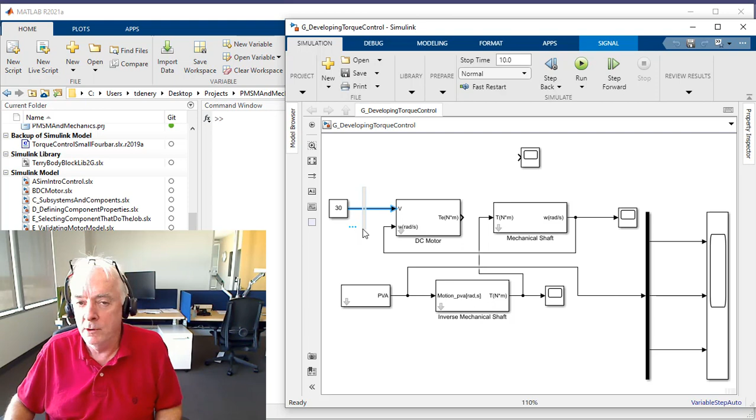And so we're going to compare what we want with what we're observing and use that information through a PID algorithm to adjust that voltage and get the torque that we need. All right. So let's get started on this. I'm going to delete all this stuff. I'll delete that scope. And I'll use that calculation to figure out that voltage to some degree, right?

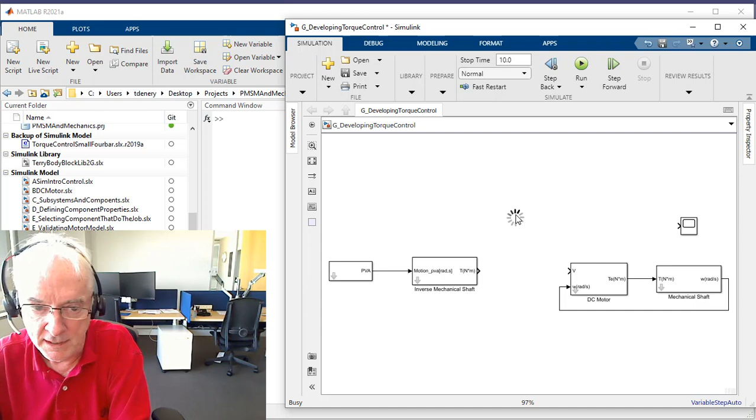So I'm going to move this up right here. Let's move it a little bit further because we're going to need to add a little bit in between, right? So our commanded motion will imply a commanded torque, and we will compare that torque with what's being delivered to the mechanical shaft by our DC motor. The algorithm will be a PID, and the PID will choose the voltage that we're going to apply to the motor, and it needs a little bit more to do it, all right?

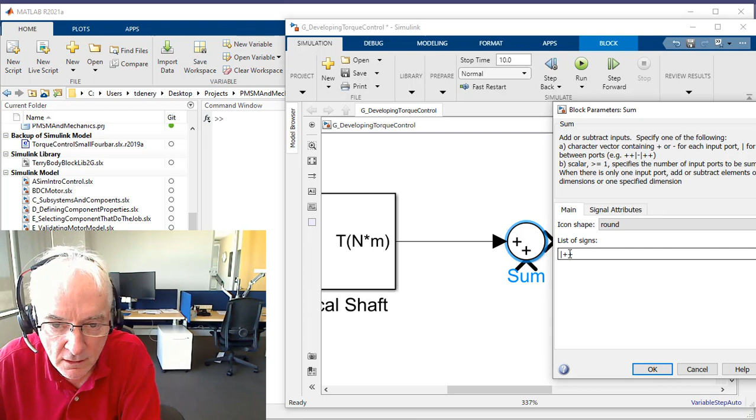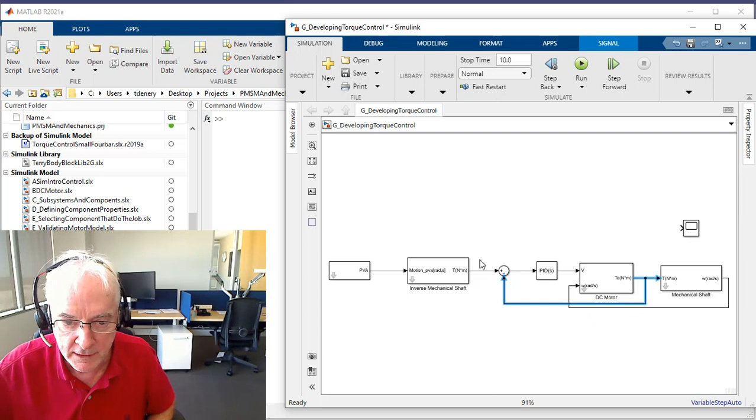So I'm going to type in SUM for the sum block. I'm going to put this in right here. Let's zoom in real close. And so instead of this being configured with a plus plus, I'll make it a plus minus. Let's hit the space bar, and through this we'll make a comparison between what we're commanding torque to be and what we're observing. The difference between the two will be presented to the PID.

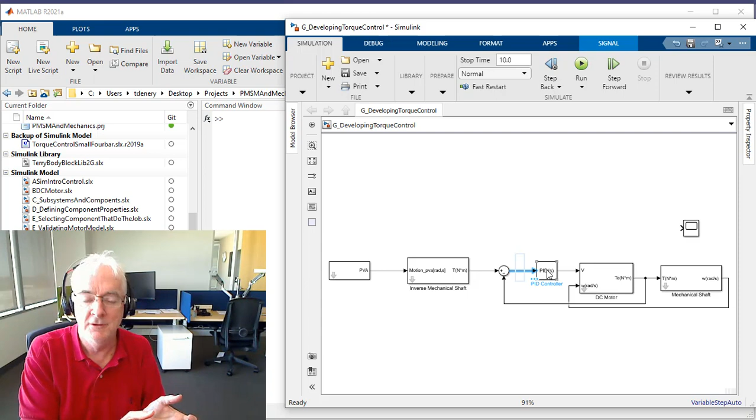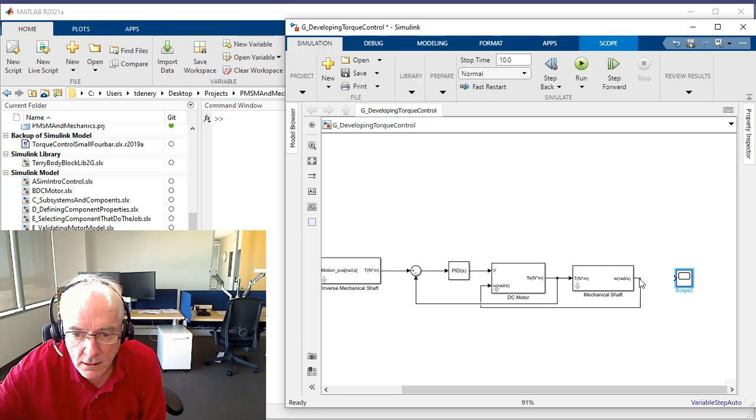PIDs are superb at driving errors to zero, or at least driving whatever's coming in to go to zero, assuming that you're able to control something real that does have that kind of impact. Okay, so let's get into what I mean by that. We'll just observe the system through this angular velocity measurement. Let's go ahead and hit run and see how we do.

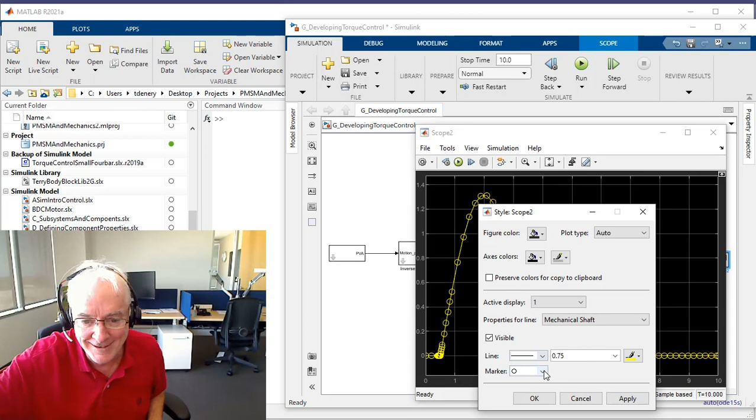Okay, so somebody put those markers back in there, so I'm going to get rid of those. No, that's me. I don't know how I did that. So let's choose none.

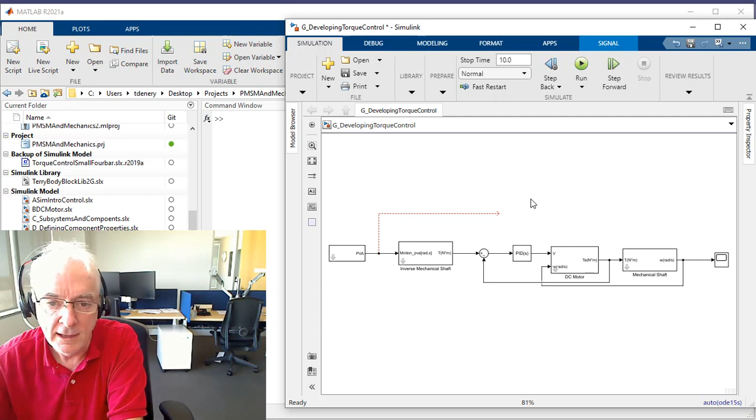Okay, apply. From the previous video, I recall that velocity really does have this kind of parabolic shape, so that's good. But we really do want to check, so I'm going to take our commanded signal, and you'll recall that that's position, velocity, and acceleration, and all we really want is velocity to do the comparison here. This selector block is very useful at just picking off that second signal, which is the velocity, and I'll send it into that same scope.

Hit that, and let's look at how we did. It's kind of interesting that we were able to get the same shape. Again, PIDs are kind of cool in what they can do, but it's not doing a great job yet, right? So let's go into the PID block.

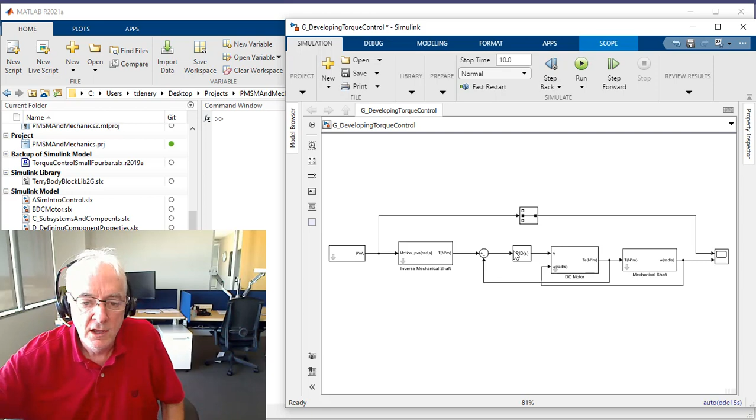Now again, PID, proportional integral derivative. It means that the error signal coming into the PID block, in this case a voltage that is going to be identified that achieves our mission, the voltage being delivered will be composed of the sum of Kp times the error, Ki times the integral of that error with regard to time, and then Kd times the derivative of that error with regard to time, okay?

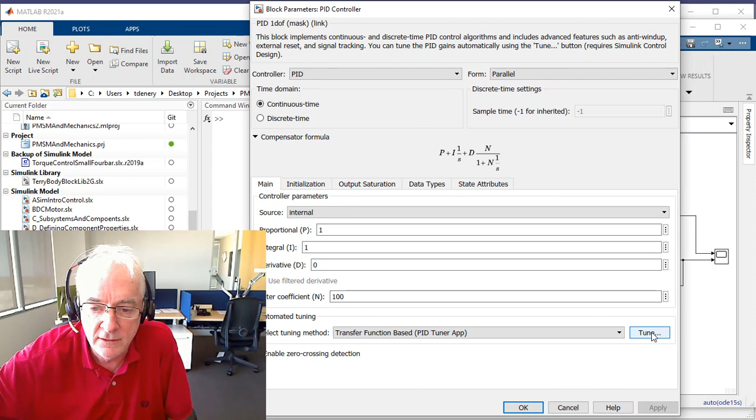And what those values should be really depends on the thing that you're trying to control, right? And it's kind of cool how, let's put this on screen so we can really see this, it doesn't even really care about units that much. All that stuff gets kind of worked out and incorporated into these identified parameters, right? Okay, let's move that back.

All right. And what we're going to see is that there's amazing capability that's been developed by controls engineers over the years, things like analyzing a step response. And this is generally thought of as, hey, I want to command a step from 0 to 1, and I want to see what the response would be. And there's things like Bode plots and root locus and all kinds of amazingly useful tools that have been in the Control System Toolbox for quite some time.

And we're tapping into that because we're sitting on top of the calculation capability of the Control System Toolbox, right? By clicking on that tune button, it's saying, well, before we're getting the dashed line with the values of 1, 1, and 0 for those three parameters. Now, if you switch it to 0, 120, and 0, which is really interesting that it's purely I, you're going to get a better response, and that's what's showing up with the blue curve.

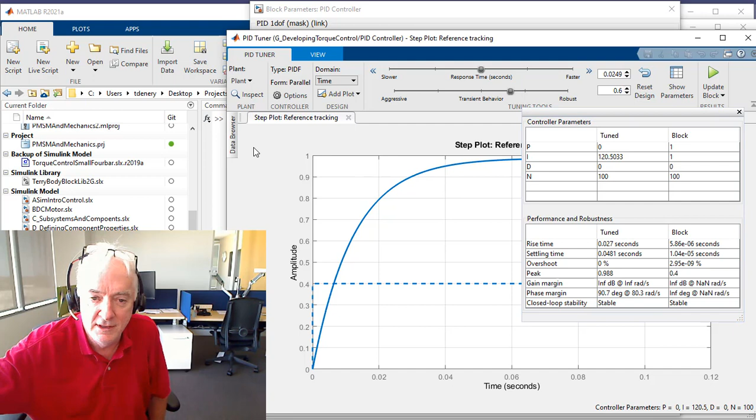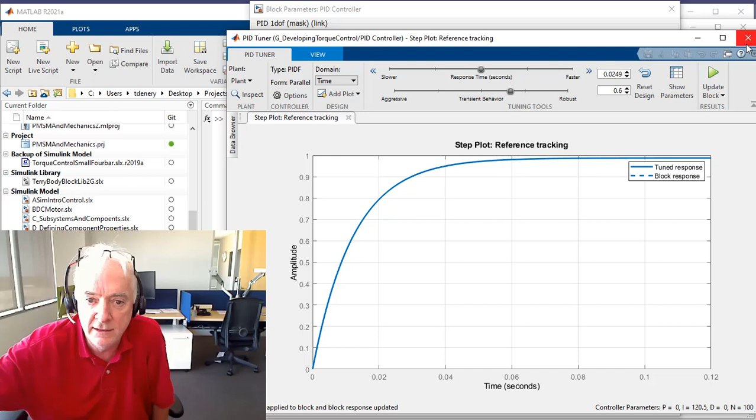And we look at these numbers down here, and it says, well, it looks pretty good. Rise time of 0.03 and so forth, and so I'm highly encouraged that this will be better, but it's always a good idea to try it out, right? And so I'm going to update my controller with these newly calculated gains, which we see right there. And let's run it again. So certainly way, way better, okay?

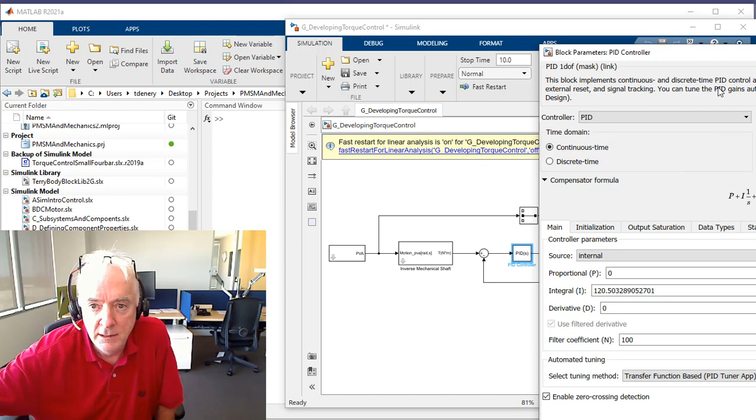But I would argue that it still can be a little bit better than that. Whatever that algorithm thinks of as being good, I may not agree with. And I definitely want that blue curve on top of that yellow curve a little bit better, right? And so I'll simply go back into the PID block. Let's hit that tune button again. And it's kind of simple what I'm going to do here. I'm going to just ask for a faster response.

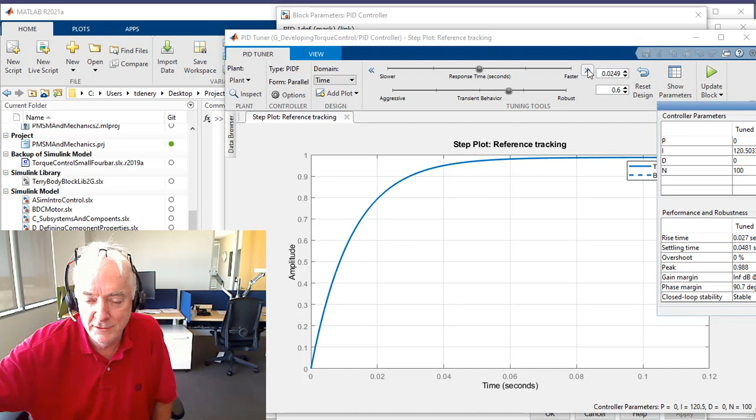So if you look at where we're going from, if I click this right here, I'm good with robustness, and these are important terms, but I'll just avoid the definition for right now. I'm going to make it a little bit faster, and so you'll see the blue curve is where we're operating now, and you'll see things like rise time and settling time. They're quite a bit better. And with that, I will hit the update button one more time.

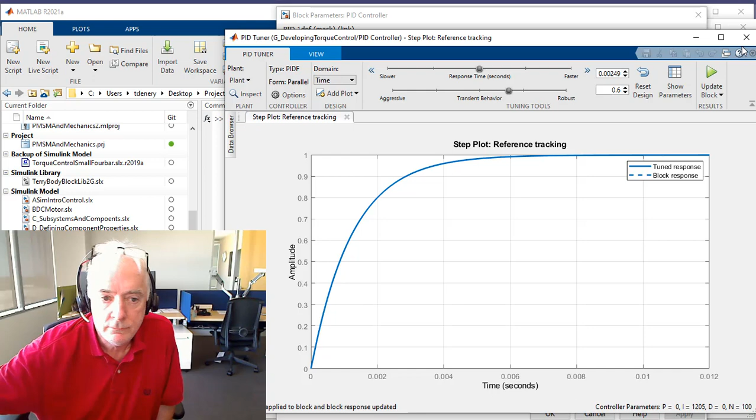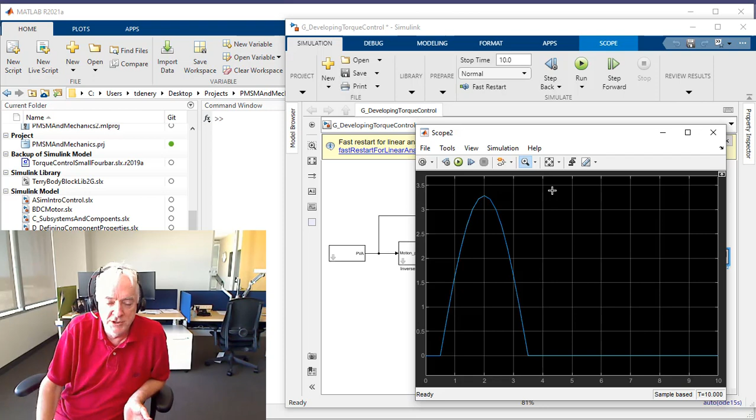Okay, and again, I'm not asking for a step response. I'm asking for a very intended motion. Okay, and so with that, I'm pretty happy. Although, we're going to go on to some additional videos, and we'll study this a little bit more. And certainly, range of voltage operation and a number of things will be considerations that we'll bring into this too.